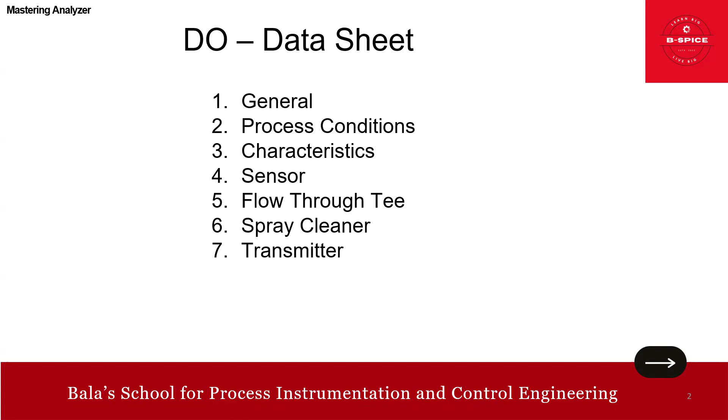In this session, we'll talk about the dissolved oxygen DO analyzer data sheet. So in the DO analyzer data sheet, we'll see, as usual, the general and process condition, characteristics, and sensor details. Flow through T, which is specifically meant for this, and spray cleaner requirement, and of course the transmitter and accessories.

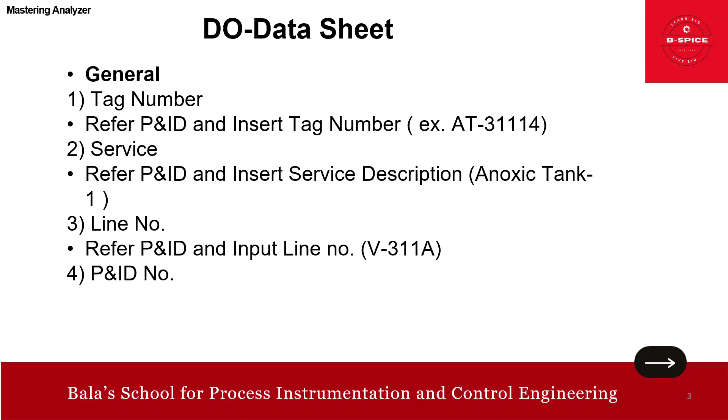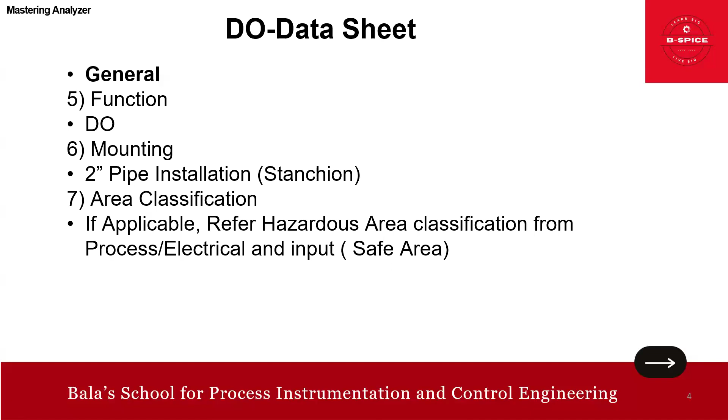So in the general, we have the tag number, service, line number, and of course the P&ID. We have to refer to the P&ID and input it, right? So there is no challenge in that. Then the function here is dissolved oxygen. DO mounting can be 2-inch pipe, and area classification, if applicable, you have to refer to the hazardous area classification drawing. Otherwise, you can put it as safe area.

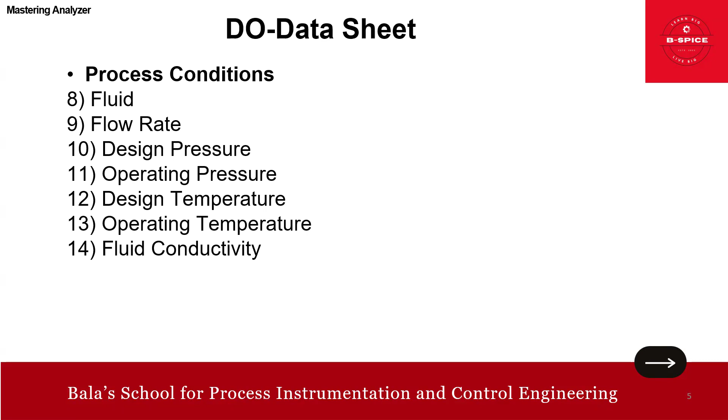So process condition. What is the fluid? Flow rate, design pressure, design temperature, operating temperature, and of course the conductivity. All this we need to get from our process conditions. Now we go to the data sheet main part, the characteristics. So characteristics, we have an accuracy of plus or minus 0.2 ppm at 25 degrees C. This is just an example. You need to refer to your project requirement.

And repeatability plus or minus 0.05 ppm at 25 degrees C. This is generally applicable. This is a typical water treatment plant; I have taken the data from it. So generally we can use this, but of course I suggest you go with your project requirement.

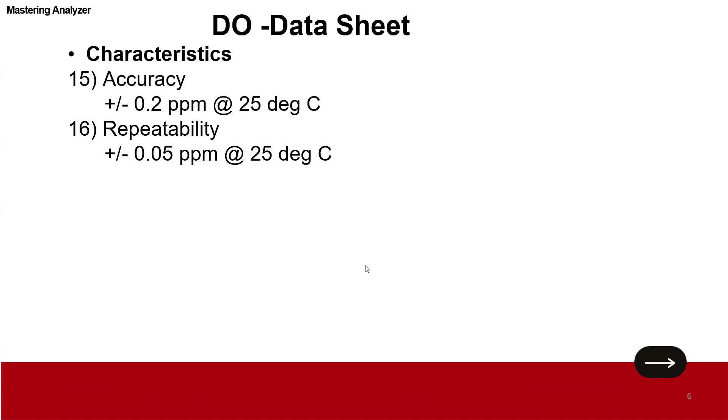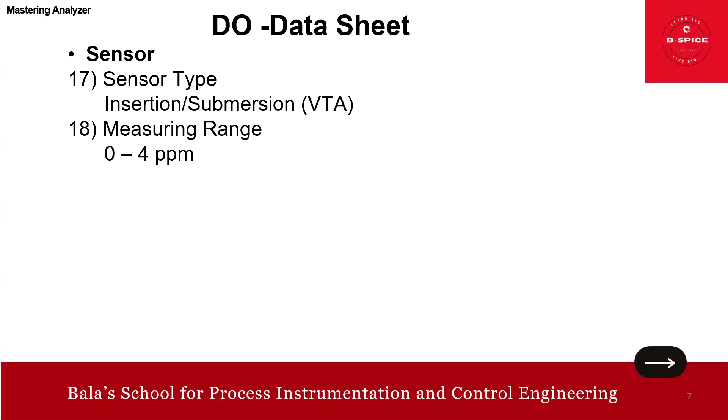Now the sensor part. Sensor type can be insertion or submersion. We can get it from the vendor, VTA. Measuring range depends again on your project requirement. In my project, it's 4 ppm. Then wetted part, you can choose Noryl, Teflon, EPDM, Viton, anything. Then non-wetted part, you can have gold. This is a cathode actually. In my case, it's gold.

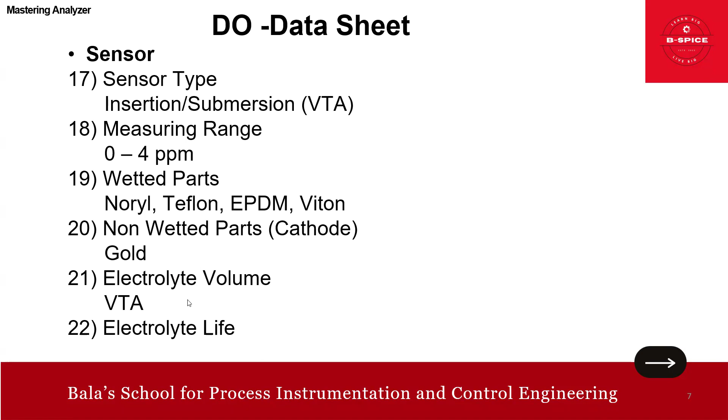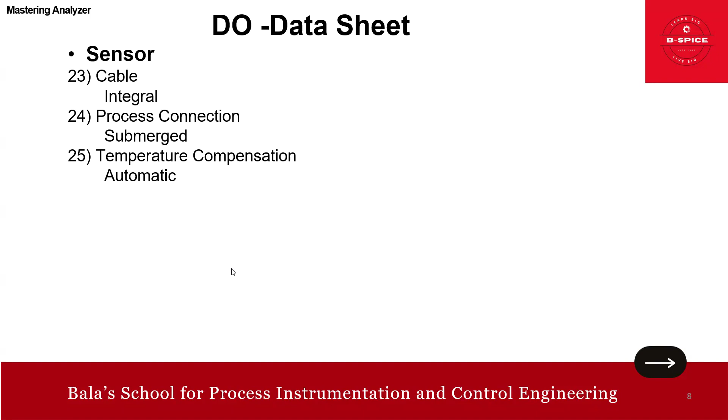Electrolyte volume, VTA. If you are in confusion, you can go for VTA, that is vendor to advise. Then electrolyte life is also vendor to advise. Then cable, of course, integral. Process connection, in my case, is submerged. Temperature compensation automatic, and operating temperature 0 to 50 degrees, for example. Then maximum pressure is 1 bar.

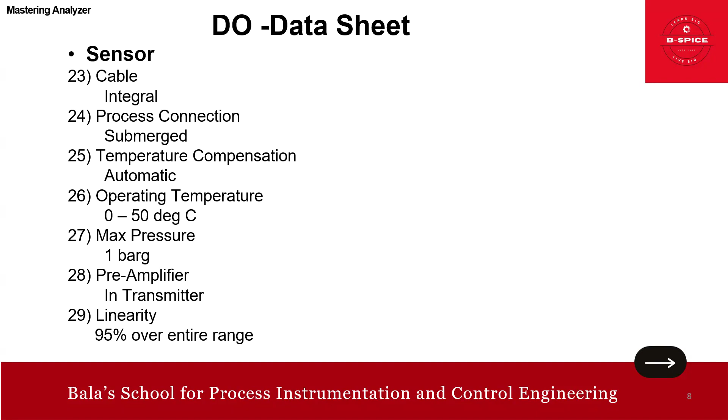And preamplifier, it is inbuilt in the transmitter. And linearity, 95% over the entire range. This is also very standard actually. So make, of course, VTA, model also VTA. Environment, in my case, it's tank submerged. So that's about this.

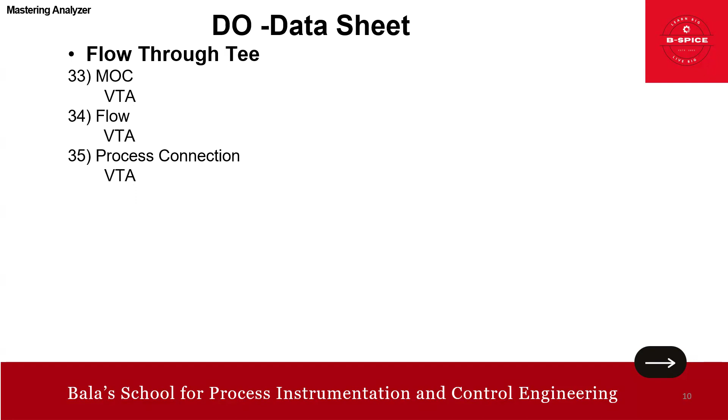Then you have a flow through Tee. MOC, meaning material of construction, we can get from the vendor. And of course the flow, and process connection. All this we can get from the vendor. Maximum pressure, temperature, all this related to the flow through. The point is we need to also look into this. Apart from the sensor, especially for the DO, you need to have this flow through Tee.

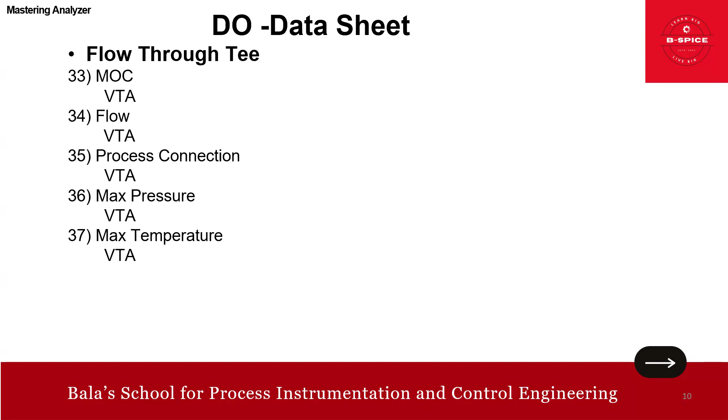Just take this as a guideline, friends. The intent of this is not to follow everything. You need to know what information we need to furnish in the data sheet, and this will give the answer for that. Similarly, for the spray cleaner, you can go for VTA, whatever spray is recommended by the vendor. The point is the spray cleaner we need to consider.

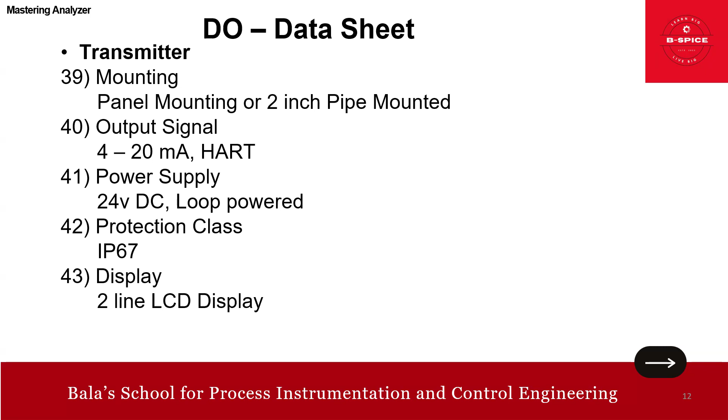Then transmitter mounting can be panel mounting or a 2-inch pipe mounted. Output signal 4 to 20 milliamps HART. Power supply 24 V DC. Protection class minimum IP65 or 67. And display, I need a 2-line LCD display. Hazardous area, safe actually. This is for the transmitter.

Then you have the transmitter electrical connection, half inch NPT, temperature effect, automatic compensation, manufacturer, of course we don't know right now, VTA, model VTA. All these we have to fill in for the transmitter.

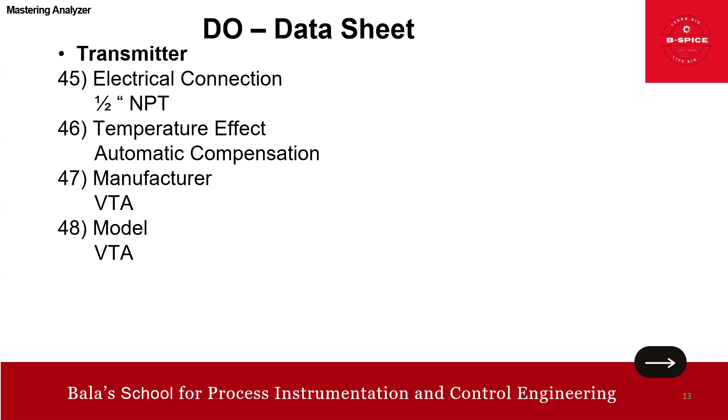Then we have the accessories. Of course, mounting bracket I need, interconnecting cable also I need. Interconnecting cable length depends on the vendor, 5 meters, 6 meters like that. And tag plate, I think this is a typo error, plate. Tag plate, we can ask for SS. That's it, friends. Very simple data sheet.

We will see some other analyzers also. So far, what we have covered is the pH analyzer, conductivity, and many other analyzers. If you have not watched, you can see pH we have covered, conductivity we have already covered, and this is dissolved oxygen. A few more are coming up, for example CEMS, oxygen analyzer, all these are coming up.